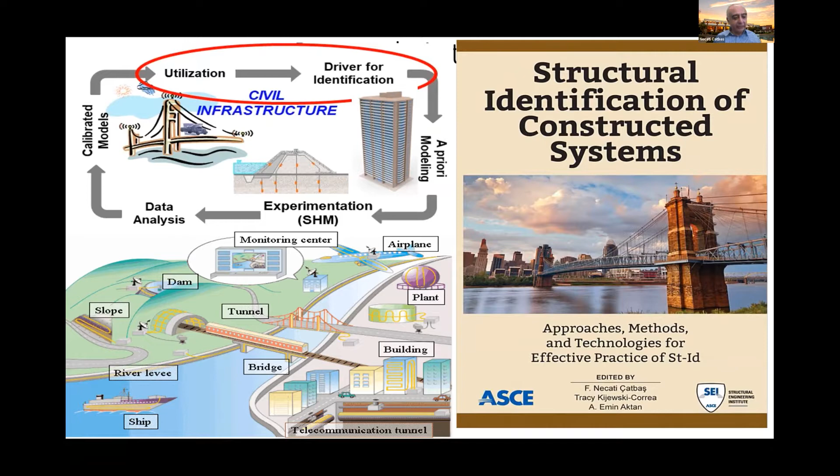Where we apply these technologies and methods are shown here in this small slide. They are not limited to one type of structure—although we have lots of bridge applications, we also have experience in tunnels, buildings, stadiums, etc., and even aerospace structures.

Some more pictures from my laboratory. We do all kinds of sensing and apply them to laboratory and field real-life applications, from conventional sensors to fiber optics to wireless sensors. I have been using image-based applications since 2003 here at UCF, since I joined, as well as infrared, and very recently we are looking at wearables.

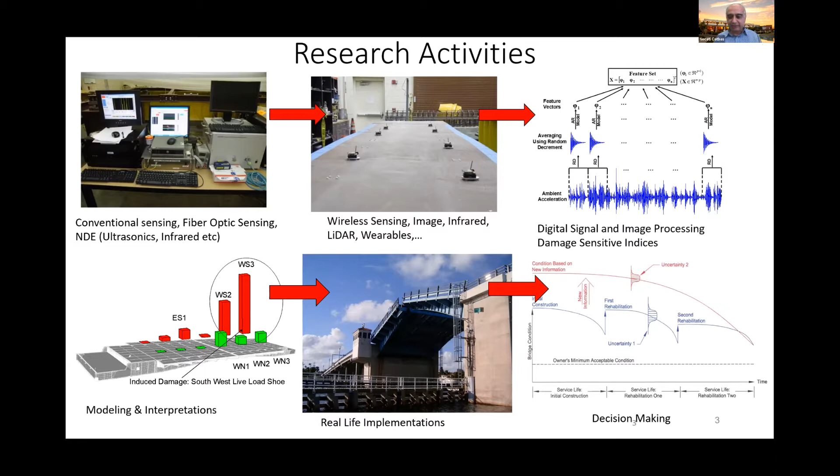And obviously, we have to analyze all this data through signal processing and image processing, and we have our own damage-sensitive indices and methods so that we can understand structures' performance. A little bit about the modeling—quite a bit of modeling also for real-life structures. And at the end, we are trying to help decision-making with all these technologies about the structures' performance, maintenance, etc.

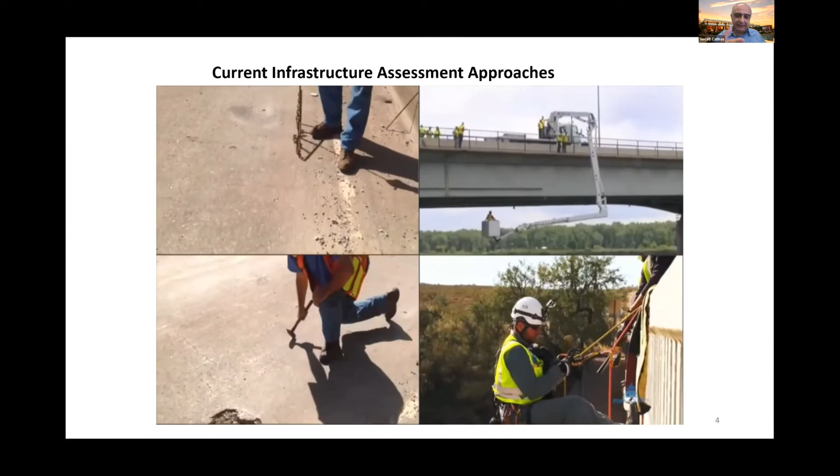The current methods utilized for assessment of civil infrastructure, in this case bridges, are shown here. As you can see, these are very subjective, very dangerous, sometimes costly. So we are trying to change it.

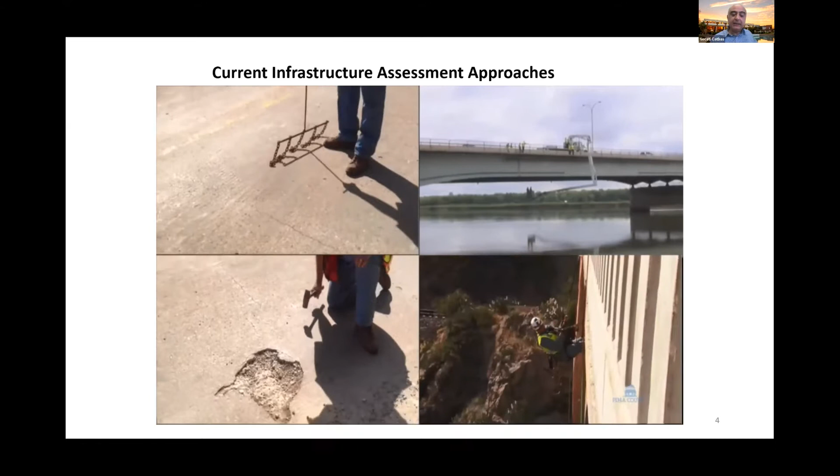Our objective is to find ways to really understand the performance and condition of the structures, and we can also predict their future performance. This is also important because

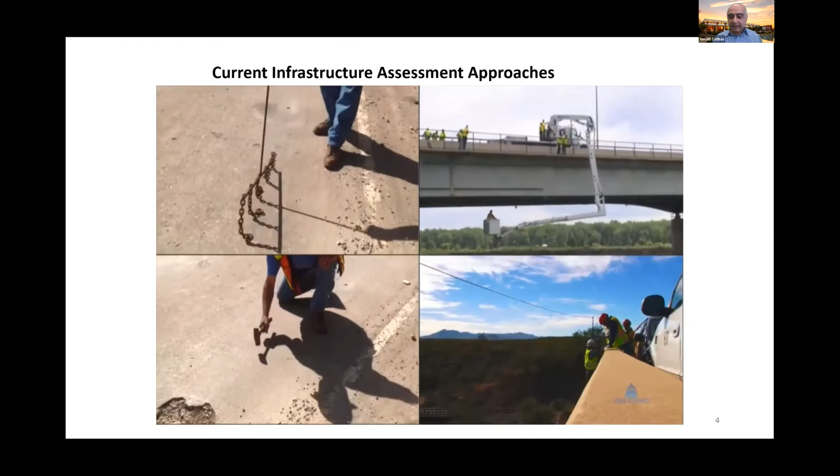the ASCE, the American Society of Civil Engineers, issues a report card, and you can see all these different categories of infrastructure rated, like a report card for a student. The overall cumulative grade is D plus, bridges C plus, dams D. So that means for our existing infrastructure, we really need to understand whether there is life left in those structures or whether something needs to be done immediately.

So for that reason, we are trying to find effective techniques and technologies, and these technologies can also be utilized for the next generation of smart structures. So that's our main motivation.

We utilize structural health monitoring on different types of structures, but now I'm going to show you a few examples on bridges. We apply structural health monitoring at local level and global level. Local level means detecting defects, cracks, delaminations, etc. on bridges or any type of structures.

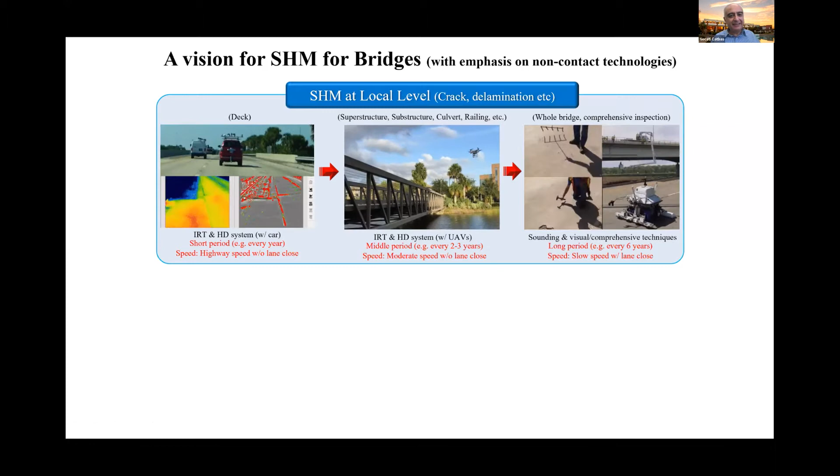You can see here we have some vehicles equipped with infrared cameras, which I will show, and we have some drones from the university also. We are also interested in robots, and these can detect local level information and local level defects.

At the global level, this means you can understand the structure's overall performance, how it deforms, how it vibrates, and you can do this to understand the overall condition and performance of the structure. You can do this intermittently, and also before and after an extreme event.

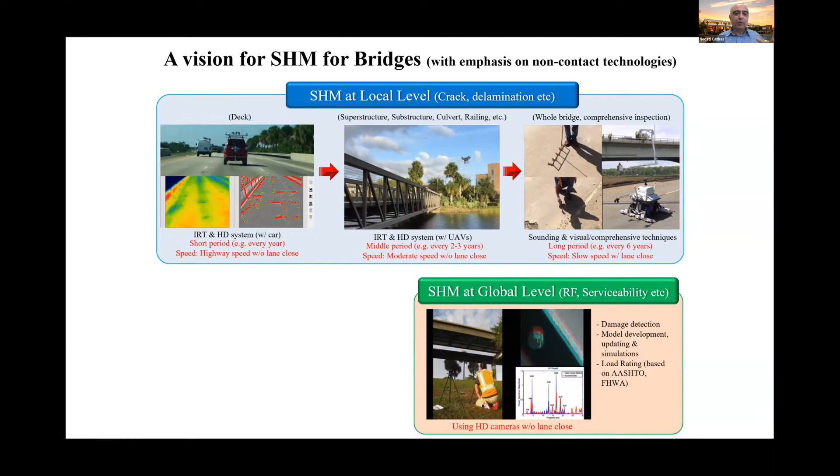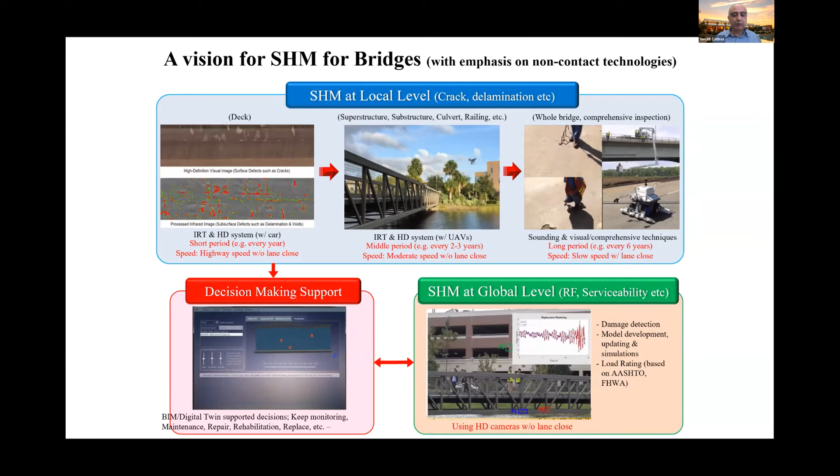But local and global level structural health monitoring is not enough by themselves. You have to combine them with a decision-making platform. In the small box, you can see software we have developed for decision-making for bridges or bridge networks, where we incorporate all this data from local and global level monitoring of the structures.

Some recent examples from our work: as I mentioned, we are looking at defects on bridge surfaces. For these, we are using vehicles equipped with infrared and also line scanning sensors.

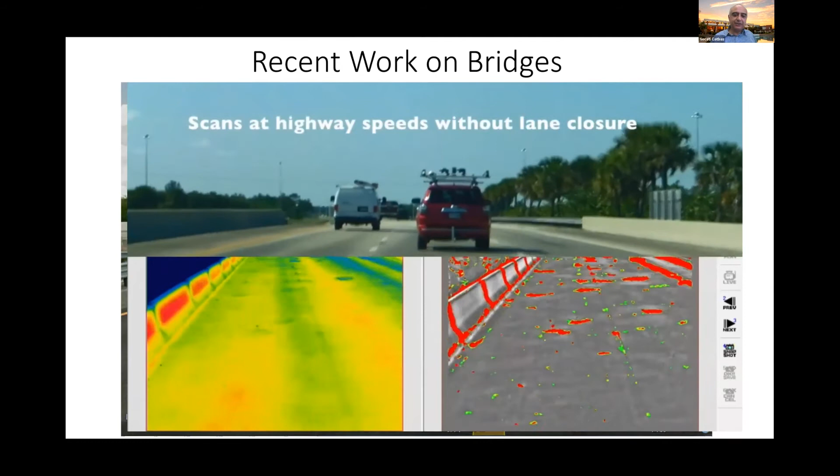You can see we are using a vehicle here, and this vehicle helps us scan the surface of the bridges with infrared—on the left-hand side is raw data, right-hand side is processed data—or with drones such as this one, and we can detect those types of defects on the bridge surface, sides, or underside.

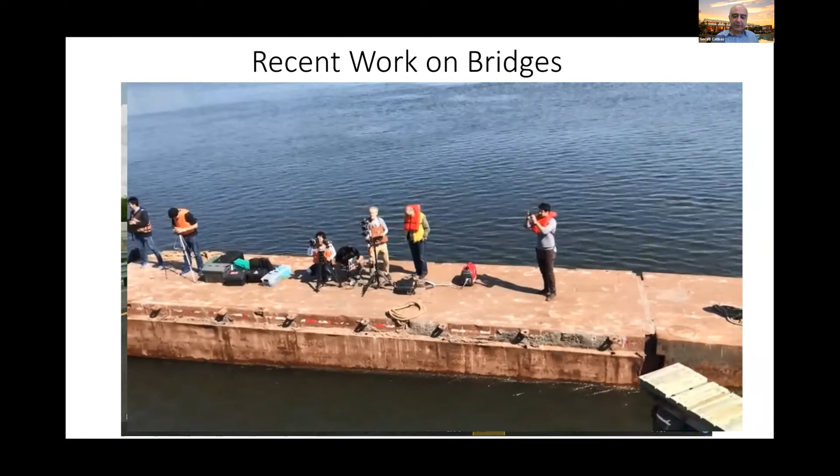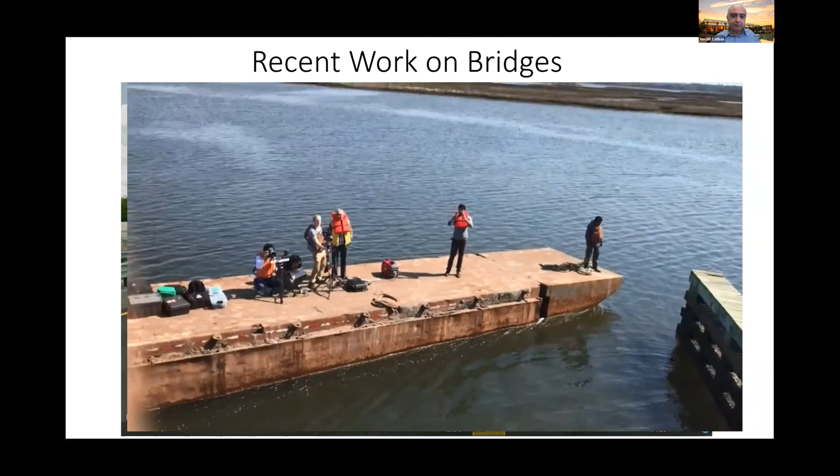When you use those vehicles, you don't close the bridge to traffic, and there's no safety issue—it's very practical, very objective. Very recently, we have been working on what we call human-centric AI and mixed reality.

I've been collaborating on this research area with Dr. Bagci from computer science. Here we have headsets used by inspectors or engineers, and they can see through these headsets, and the computer, trained previously, can detect all these deficiencies.

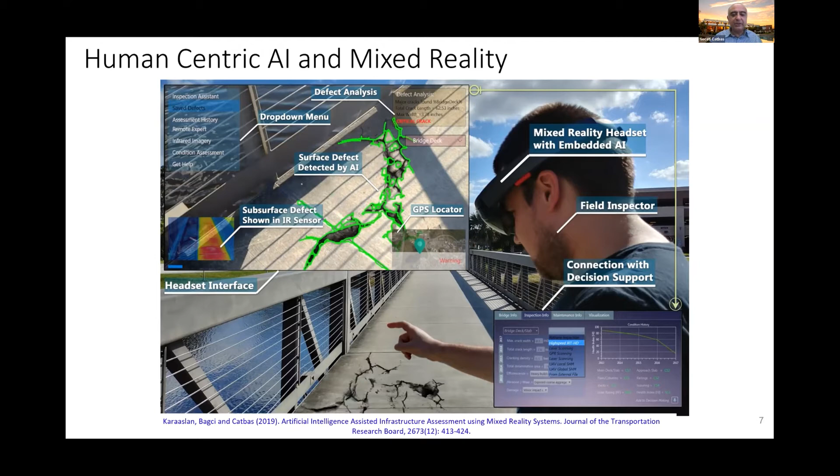We got a nice Kikuchi-Karlaftis award for this, and there's also a short video about this application—it's a bridge near Winter Park. Here the engineer is using the headset, scanning the different parts of the bridge.

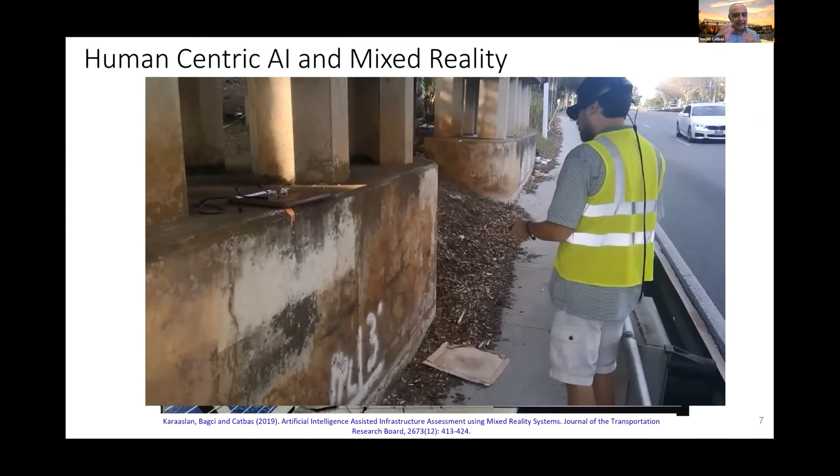Let me move a little further here. These different cracks can be identified independent of direction, so you can detect these cracks, and the user or engineer can interact with the computer, improving the detection rate by training with the help of the inspector.

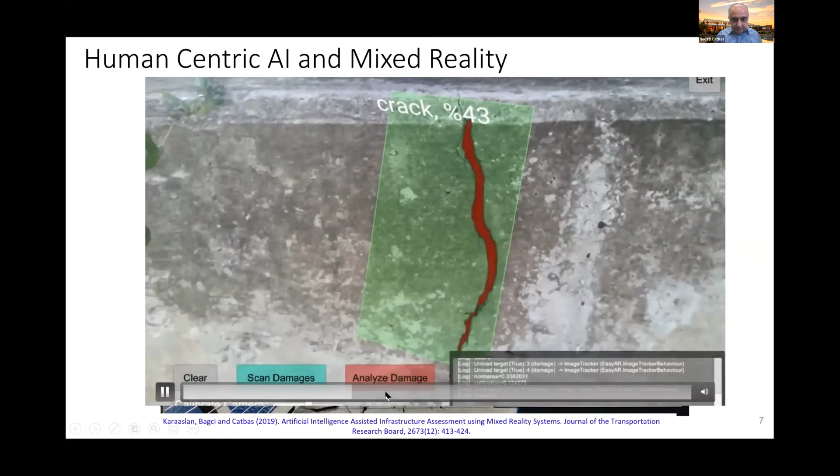This is detecting the cracks—it's a longer video, so let me go a bit further. It's still crack detection.

But there are also spallings, and these are routine applications that bridge inspectors and engineers have to do on bridges, taking notes. Here, we are utilizing this technology, but in this case, the spall is not detected very effectively, so the engineer intervenes and improves the detection of this spalled area.

So you will see the analysis will come up with better results. This is another application that we have been working on. So these were some of the applications at the local level.

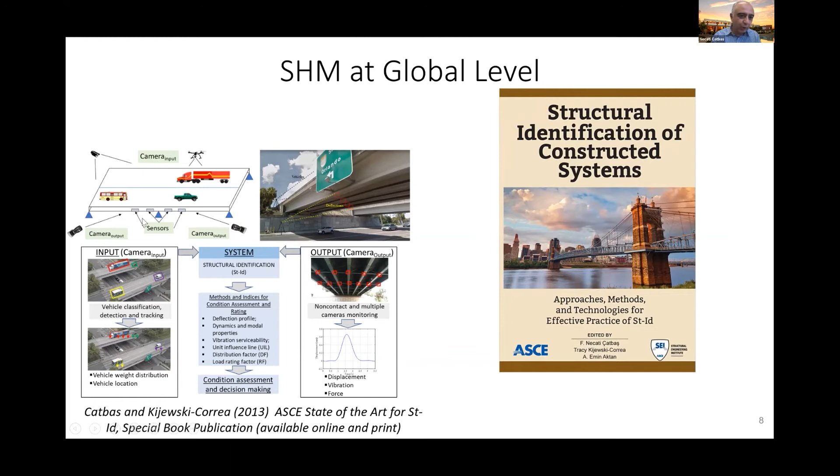Now let's look at the global level applications. Here we are looking at bridges. This is a 417 bridge, and you can measure the input and also the output, and you can utilize this data for understanding the bridge. In this case, we are using cameras and drones, and also you can incorporate sensors to understand how these bridges are behaving. So this is another application from a long span bridge.

And we correlated our findings here with this non-contact camera measurements with the sensors. So we were very happy with the results. So this is global level assessment of the structure.

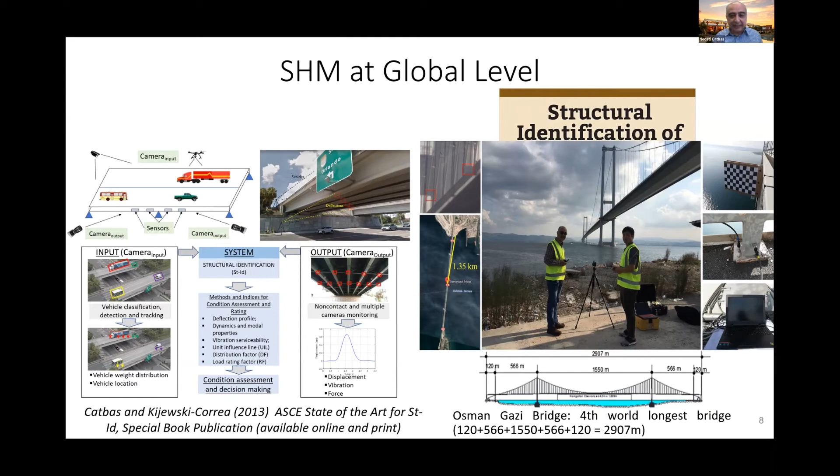So the next thing that I'm going to show is human structure interaction. You might remember this game. Some of you might be into our stadium. This is from the championship game.

And I have been monitoring the stadium since its opening. It's more than 10 years right now. And what happens is the people, when they are jumping up and down, obviously this is true for all these stadiums, they are inputting lots of dynamic load on these structures. Especially when you play a certain song, there's a coordinated motion, and that's inputting dynamic loads to the structure.

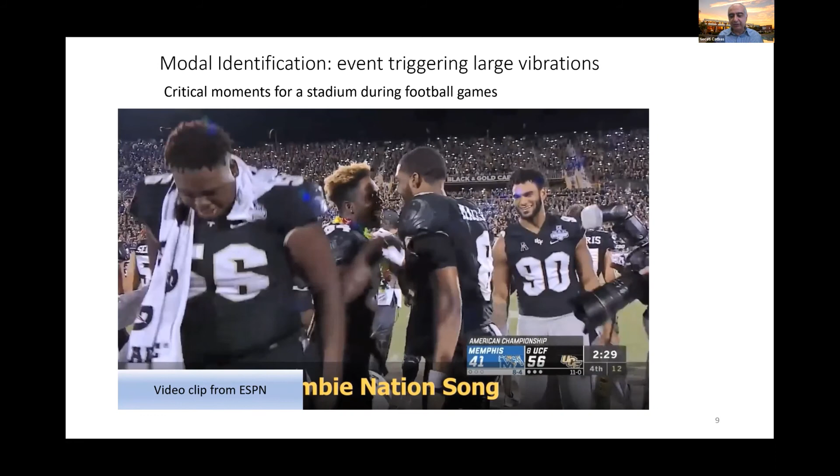So we have been using sensors to monitor these type of activities, different type of sensors, but now we are also using cameras. And what I'm going to show you here is we take the image data, the video, and for the dynamic response of the structure, we decompose these into individual mode shapes or components at different frequencies, and then we magnify them. I have to emphasize that these amplitudes are not actual amplitudes.

These are motion magnified amplitudes, but these give us a very good information about how these structures are behaving at different frequencies. Another important thing here is that instead of using point sensors, we are almost getting here infinite resolution because we are covering the entire structure. This can be applied to bridges, this can be applied to buildings, this can be applied to airplane wings or rockets on a launch pad. So application areas can be very different.